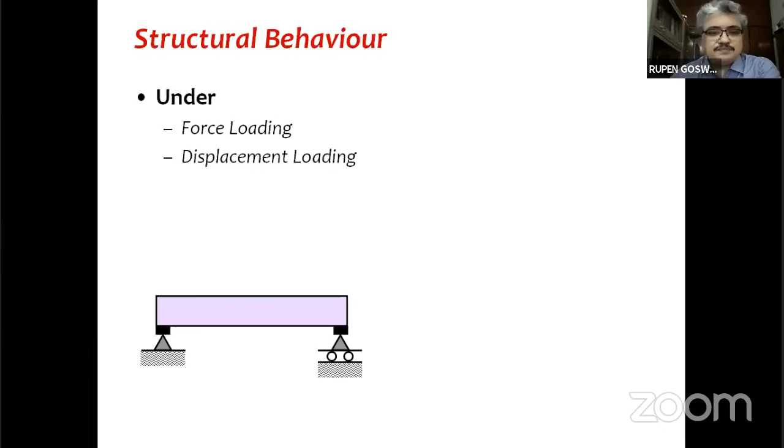To begin with, let us look at this: we have force loading and we have displacement loading. I will try to reinforce this thought through a simple example. Let us assume we have a simple, simply supported beam, and we apply a concentrated load at midspan - elastic material, prismatic section, everything. If we do this, we know there will be deflection and we should be able to calculate this deflection. If it is an elastic analysis, this is first or second year mechanics or analysis, so everybody should be able to calculate this deflection. The important point here is that when a load is applied on a structure, displacements or deformations are caused.

Now let us take the same beam example, and let's say we tie a belt at midspan and pull it down to produce a displacement delta. What will happen now? I'm sure everyone will realize that forces will get generated in the system. So when forces are applied on a structure, displacements are caused; similarly, when displacements are imposed, forces are induced. This is a very important concept that students have to get used to.

That's the first part. What is the second part? This is the tricky one. In the first case, if the load is applied at midspan, everybody will be able to tell what that deflection will be - if the length is L, if the flexural rigidity is EI, everybody will very quickly be able to tell what the deflection is.

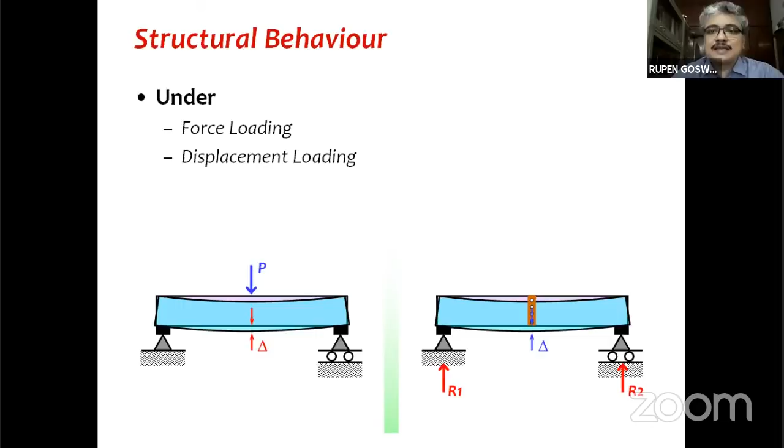The second level is to compute how much that force will be, which we have to get used to in order to truly understand earthquake resistant design. Now let me take this one step forward. Let's say we have two simple steel bars. In the first case, I apply a force, and as I apply an axial tensile force, there will be some axial displacement, which we can all calculate. As I increase the force, I will see more and more displacement.

In the second case, now I'm pulling it. Again, just like in the first case, there will be some reactive forces, because if this is the axial bar and this is the support, as I'm pulling it, I have to have a support reaction getting developed. So that is the force generated in the bar, and that is the support reaction. What is the big difference here?

The difference is in what happens post yield. In the force case, this is what is called a force control system, where the loading is force. A force is applied, and as it is gradually increased, deformation increases, but we cannot apply force beyond the capacity. The important thing is the margin between where the system yields, if it yields, and the maximum force that can be applied is limited.

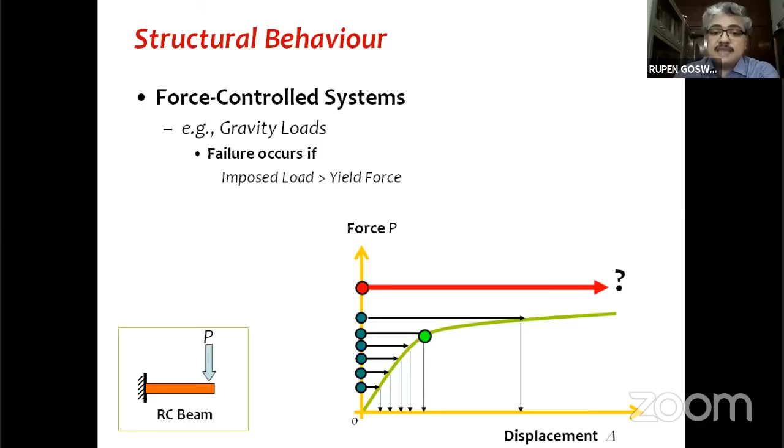But in the same situation, if a displacement is applied instead, it is possible to apply large displacements, much more than the yield displacement, provided we make the system ductile. That is the important thing: this margin can be increased to a large extent by making a system ductile. So what is this ductility?

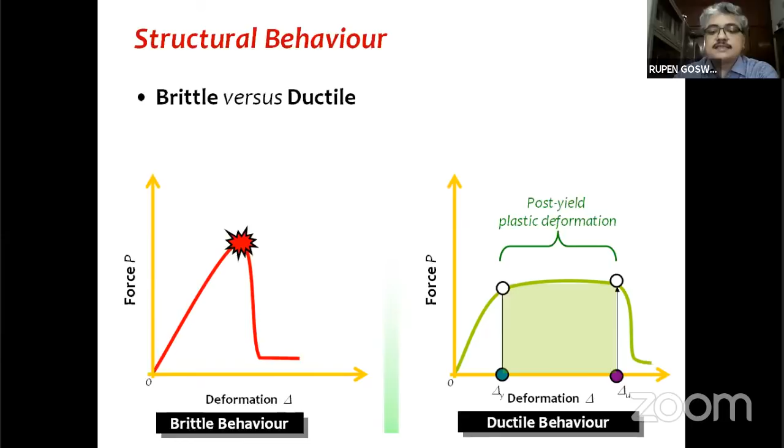In the first figure is the load deformation response of a so-called brittle system. As load or deformation is increased, it reaches a maximum and then suddenly fails, meaning the load capacity drops. In the second case, even after the system yields, it continues to sustain that load over a large displacement or deformation. It is this plastic, post-yield deformation that is important, and that is the measure of the ductile behavior of the structure.

So we define ductility capacity as the ratio of the ultimate deformation to the yield deformation. Note that the point where it effectively yields signifies damage beyond that. So ductility comes only after damage has occurred in the structure. An elastic structure exhibits no ductility. So when we talk about ductility, damage is inherently part of that behavior.

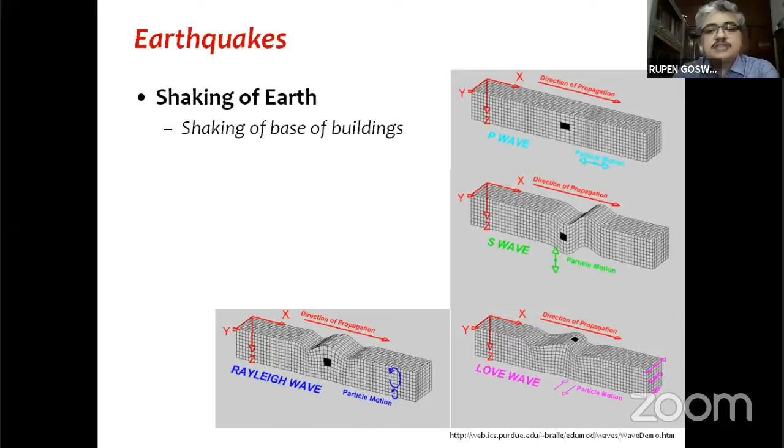Why are we talking about all this? Because earthquakes essentially cause shaking of the earth, which is nothing but shaking at the base of the structure. The bigger the earthquake, the larger this shaking. This shaking is nothing but movement at the base of the structure, so essentially it is a displacement loading acting on the structure.

How much will that displacement or shaking be? That depends on how big the earthquake is. There can be a small level of shaking, a medium level, or a large displacement imposed at the base of our structure. How do we measure that? One way is, of course, magnitude as a measure of the size of earthquakes, and there are different magnitude scales, which I will not go into in detail.

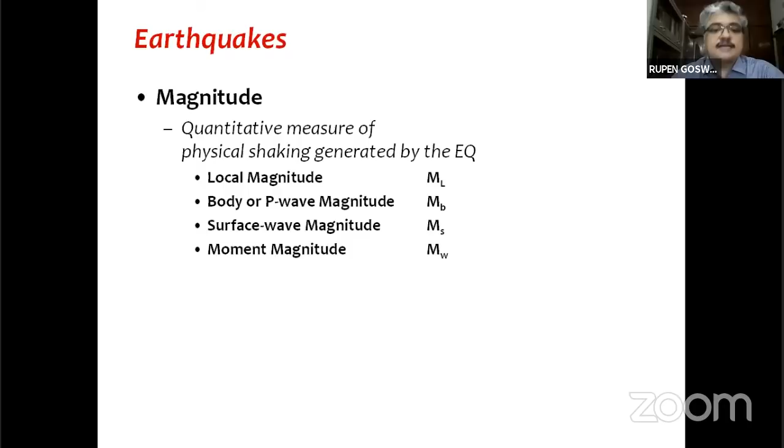One of the most common ones we use is the Richter magnitude, which is measured based on how big the peak is in an accelerogram. Based on that, the size of an earthquake is usually denoted. Of course, every earthquake is unique, having different amplitudes, different durations of shaking, and different frequency content, which was also mentioned yesterday by Professor Murthy. So they are all unique.

But the question is, how does it matter if there is a very big earthquake, for instance a Chile earthquake, which has very large amplitude and duration?

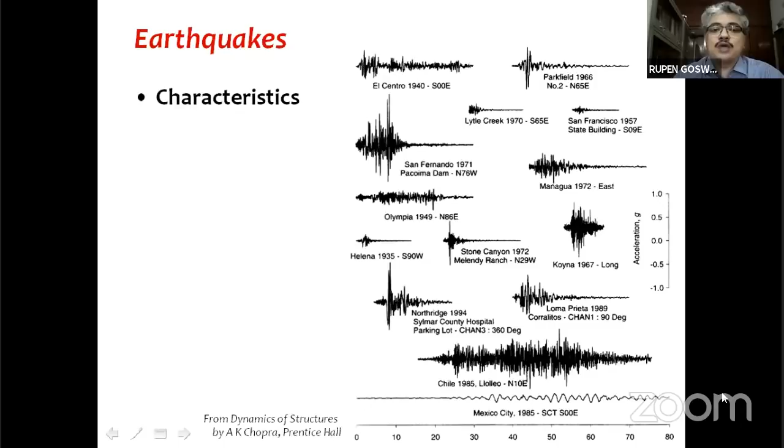Did we in India feel anything when the big earthquake happened in Chile? Of course not. So is magnitude really what we should be thinking about as structural designers, as engineers? The answer is no. That is why we talk about something else: the intensity of shaking.

Essentially, we try to look at what is the zone of influence of an earthquake and how big the shaking has been in that particular zone of influence. So therefore, we use another measure, another scale for measurement of earthquake size, and that is intensity.

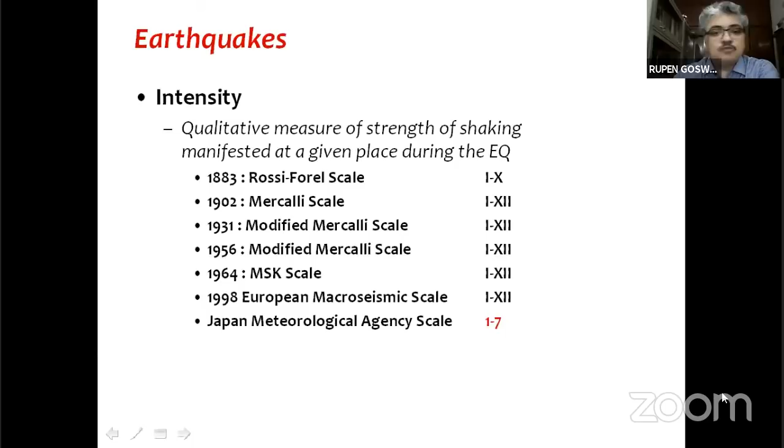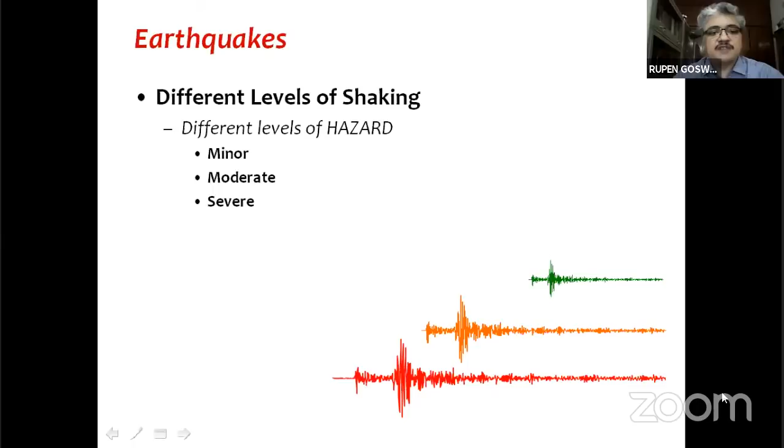So coming back to the point that there can be different levels of shaking, we loosely call them minor, moderate, and severe level of shaking. The other aspect is that if we look at the size of earthquakes using magnitude as a measure, we see that many earthquakes occur which are small in magnitude, and very few occur, on average, which are very large. So there is a certain distribution of these earthquakes.

This is where the concept of return period of earthquakes comes in, whereby these small size or minor events occur very frequently. Over a certain period of time, there will be many such small earthquakes, some moderate number of medium size or moderate events, and very few very large, severe events.

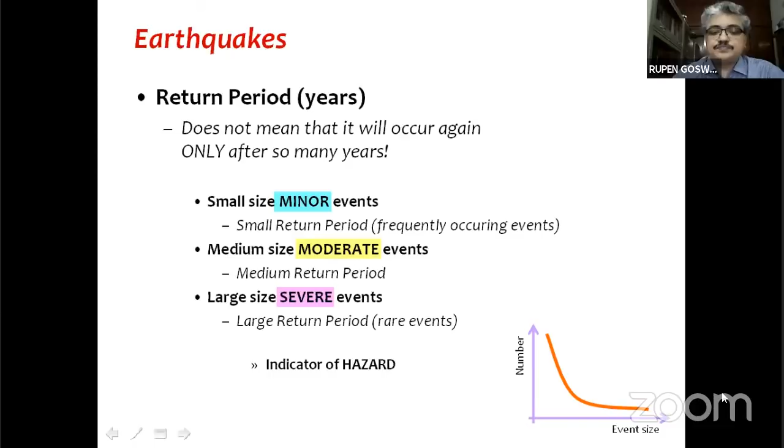So these minor, moderate, and severe levels of earthquakes, depending on their size, will cause a small amount of displacement loading on the structure, a medium level of displacement loading, or a high level of displacement loading on the structure.

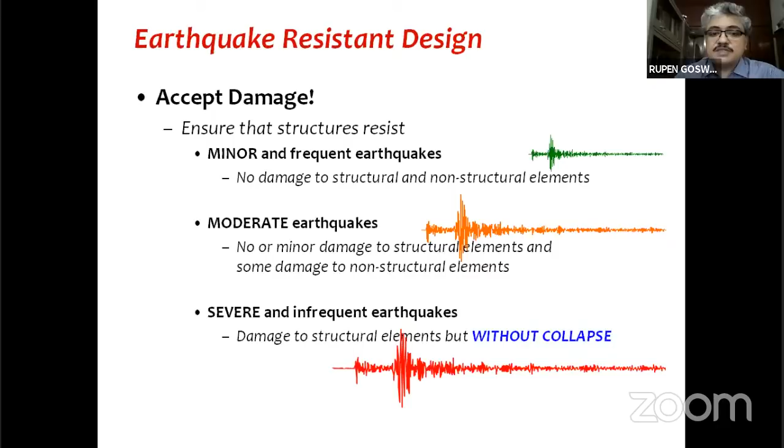But when that very large earthquake comes, once in a lifetime kind of situation with very large return period, then the only criterion I'm putting is that my structure should not collapse. It can get damaged. It is supposed to get damaged because as a designer, I have designed it to get damaged. But the only condition is it must not collapse. So this is where earthquake resistant design becomes so very different, so very special.

If it was reinforced concrete, here is a steel building. If that building did not collapse, here you have a 21-story steel building, which you are seeing, which collapsed during the 1985 Mexico City earthquake.

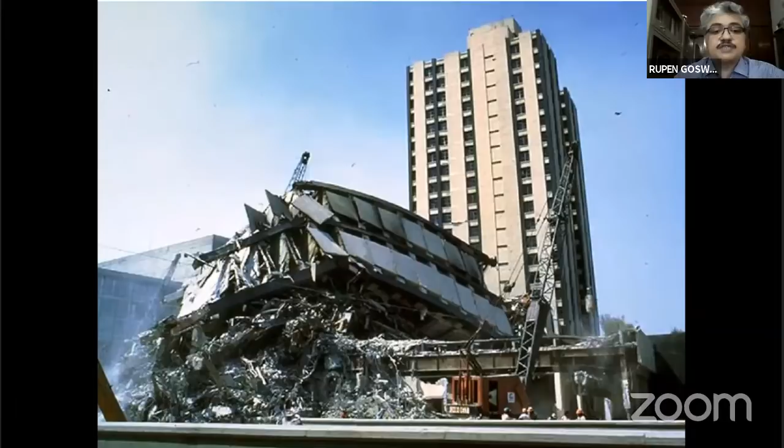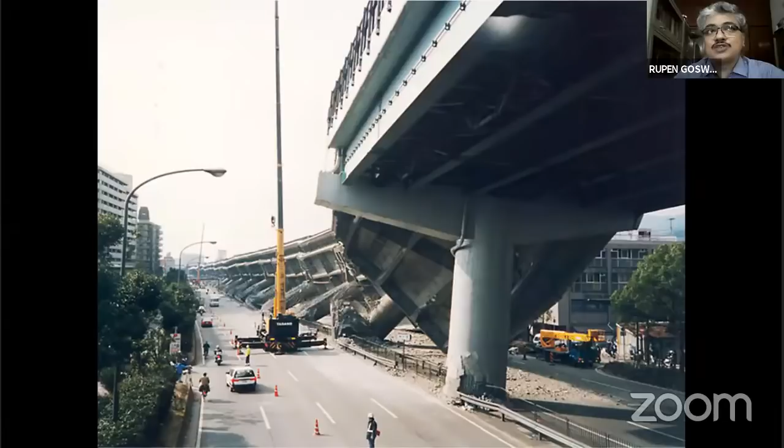So what went wrong? The only thing that went wrong is that we designed the structures, but we did not ensure, we did not guarantee that displacement capacity that is required to resist the big events. Strength is not the issue. We were supposed to provide the displacement capacity and the ductility capacity. That was where we missed the bus.

So quickly to summarize, we deliberately design structures for a much lower level of force so that we don't have to design for such a high force. So anybody who says seismic design is going to make my structure costly, actually it's wrong. The seismic design is built in a way to bring in economy in design. Otherwise, if we want a structure which should not get damaged, that structure would have cost much more.

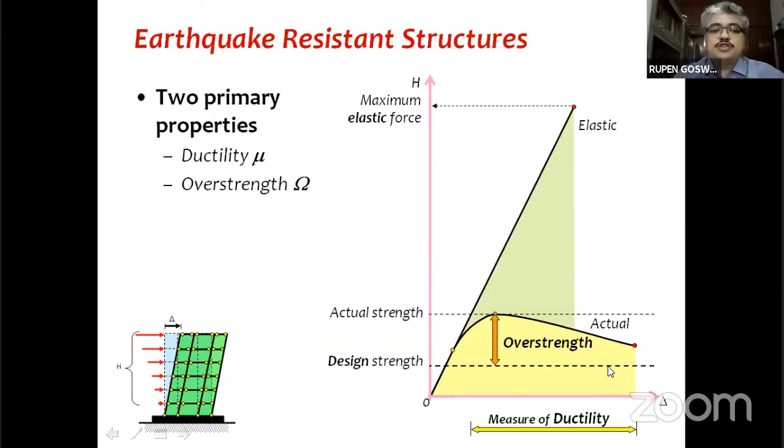But then we also realize that there is another issue of overstrength, because the way we design our structures, our design methods, we use partial safety factors and so on, all that gives some overstrength. So there are two issues: one is ductility and the second is the overstrength. And that is where we combine these two along with redundancy, we'll see, to reduce the force for which we actually have to design our structures, and that we do by use of response reduction factor.

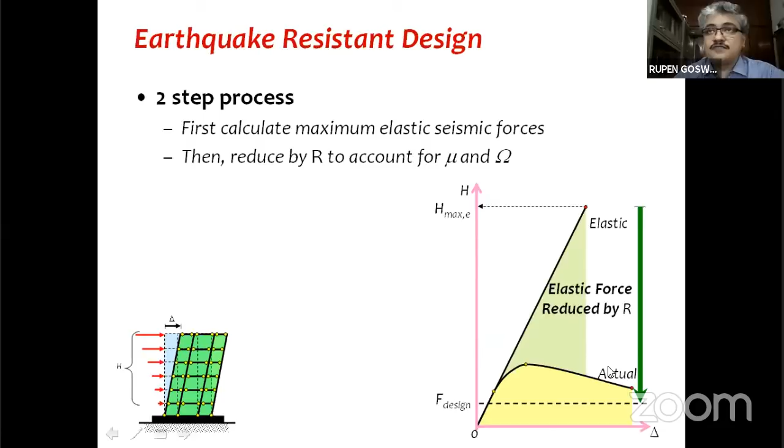Very popular item for earthquake designers. We want to use as high a response reduction factor as possible. So we first calculate the elastic force that would have been induced in the structure if it were to remain elastic, but then we don't design for that high force. We reduce it by use of response reduction. And this is where the key is.

How much should the response reduction factor be? Can I reduce the force capacity to this level, this level, this level? How much? So let us understand that. If the structure were to remain elastic, that would have been the amount of force which would be induced in the structure. But we don't want that. We say, oh, that will be too costly. Design it for little lesser, give me little more economy.

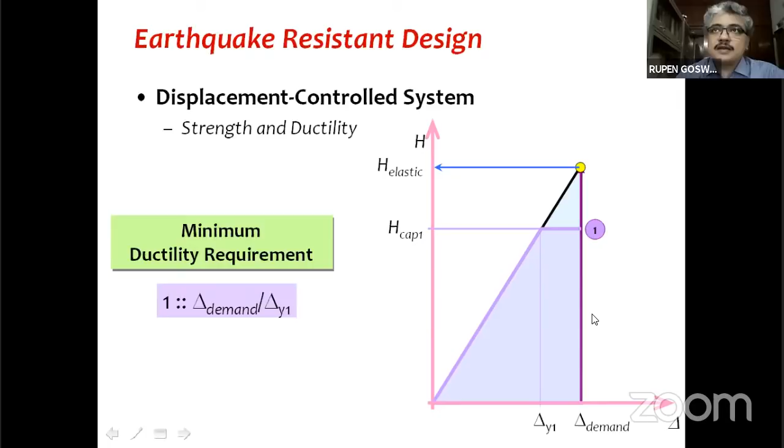Fine. As a designer, you can give this as an option. You said, okay, you don't have to design for that. Your structure doesn't have to have that high capacity. It is okay to have this much strength capacity. But then that structure will now be getting damaged at that level of displacement. And therefore, there is a certain ductility requirement that comes along with the reduction in the capacity.

You can say, oh, this is also too costly, give me little less. Well, now that little less comes with a little more requirement of ductility, and so on. The question is, can we go on reducing the strength requirement by promising more and more ductility? Answer is no, because there is a practical limit of how much ductility that can be put in structures. And that is where design codes come in and say, look, you have to design your structure for at least a minimum lateral force, because we cannot go on reducing the design force indefinitely.

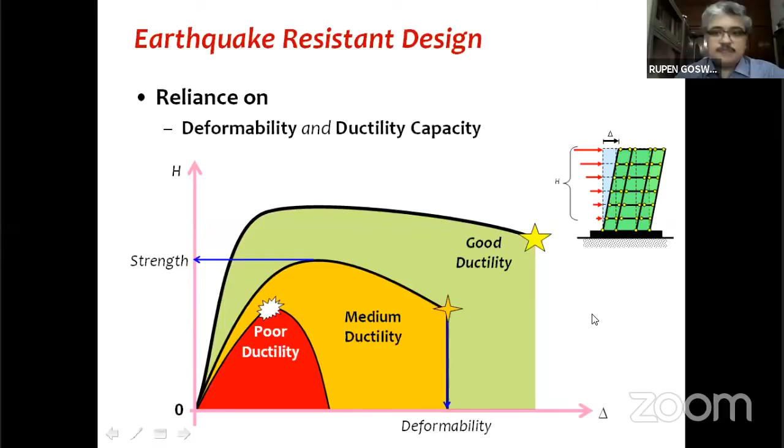Although in earthquake resistant design, reliance is placed on deformability, which is displacement capacity and ductility capacity, design codes also talk about this basic minimum design force, at least currently.

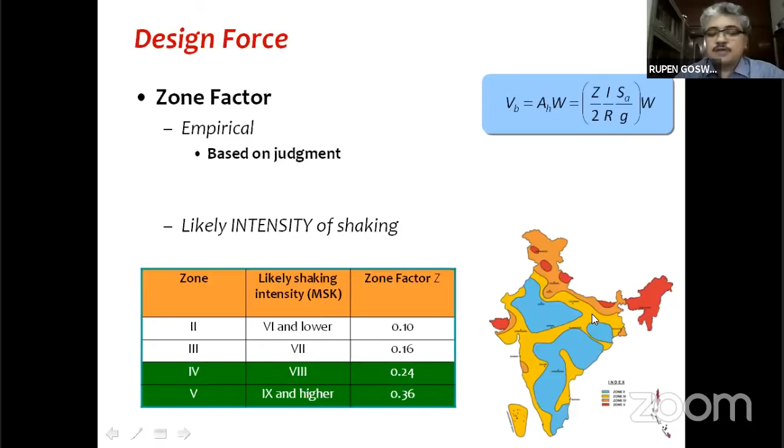We all know our country is divided into 4 zones, and we have these zone factors. Essentially the zones represent the likely intensity of shaking. Zone 2 is expected to see intensity of shaking of 6 and lower, whereas zone 5 sees intensity of 9 and higher. Professor Raghukanth will talk more about this aspect of hazard, so I won't touch upon that.

This factor 2, Professor Murthy mentioned yesterday. I will not talk much about it, except that we are just using it. Hopefully in the near future, we'll sort this out and come out of that.

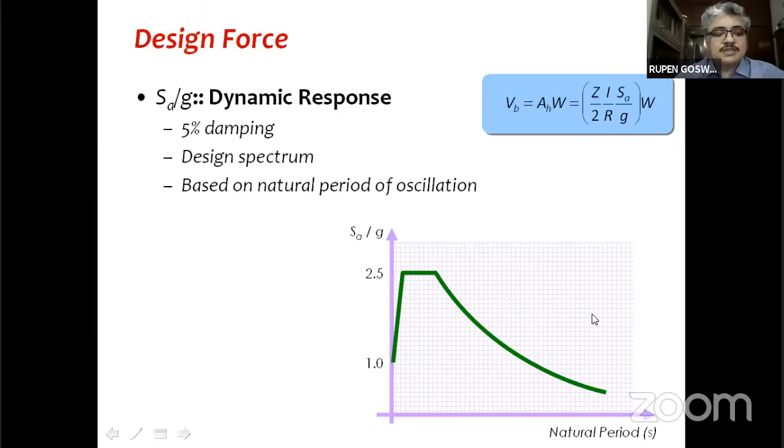Then, of course, we have this design spectrum, which essentially captures the possible dynamic behavior of the structures, and then the importance factor. Now, what is this importance factor?

We can't treat people who are injured during earthquakes. So if you want less damage to happen, then you have to necessarily enhance or increase the strength capacity of the structure. And that we do by use of importance factor.

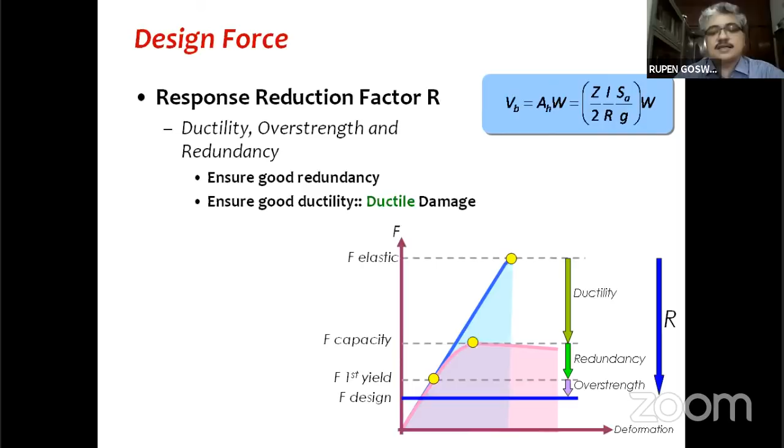And then finally, the response reduction factor that we use in the denominator to come to the design force from the elastic force that would have been induced in the structure if it were to remain elastic. Here our design codes, for instance, if you go to table 9 of IS1893 part 1, 2016, it will give response reduction factors for different types of structural systems.

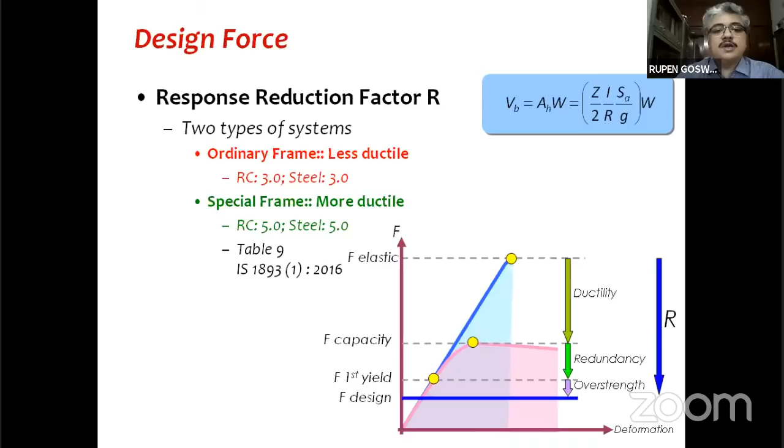Essentially, we classify our structures into two groups: one we call ordinary, which are not so ductile, and one we call special, which are supposed to be ductile. And therefore, we use a higher response reduction factor for that. So that is the whole issue.

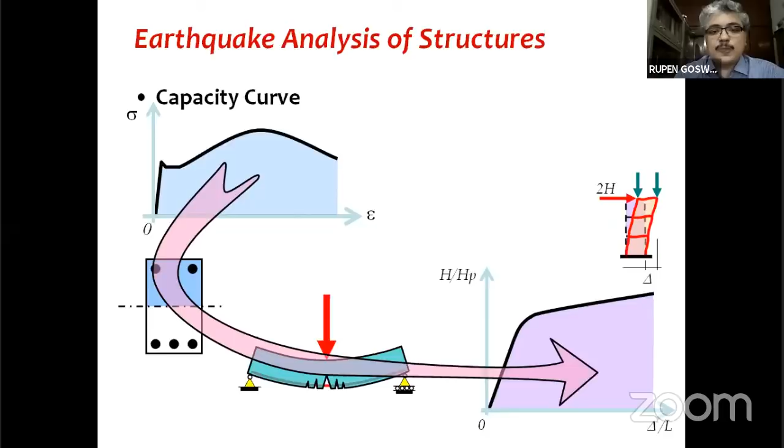If we start applying lateral load, we know this will be the bending moment diagram. So if damage has to happen, it will happen where bending moment is maximum, which is at the ends of the members, at the end of the beam and at the end of the columns. Now, since the beam has lesser capacity than the column, as this lateral load goes on increasing, if damage has to happen, obviously it will happen in the beam.

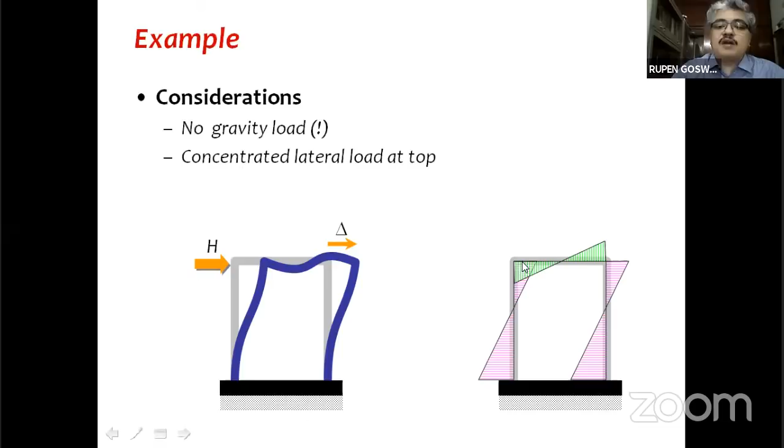So this is what we'll get: as it is being pushed, we will see two plastic hinges form in the beams for this particular case. And we can compute at what level of load and what level of deformation this will happen. So that is the load deformation graph up to that point.

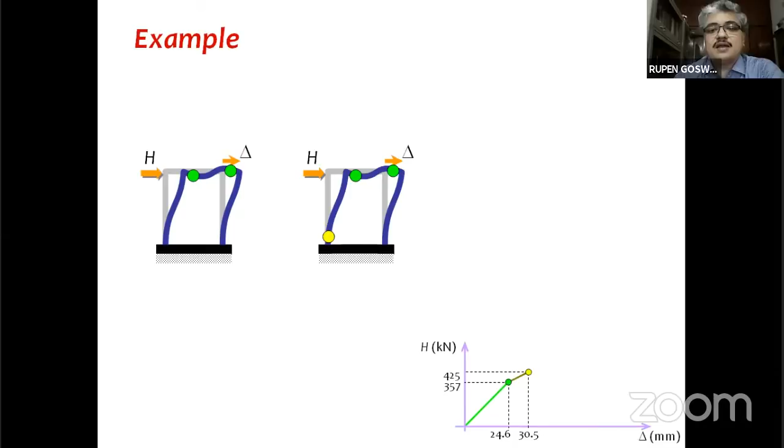If we continue to push further, we will see this left end, let's say for this particular example of the column, will form a plastic hinge, and it is possible to calculate that load and deformation. If we continue further, eventually a plastic hinge will form at the bottom of the right column also, and that will be the load deformation.

Now, if you see the last one, you see that there are 4 plastic hinges, and that means it has formed a mechanism. What will happen after this? Well, if each of these 4 plastic hinges can continue without losing strength, the structure will go on like that.

But that seldom happens because real structural elements made of real materials have limited deformation capacity. So at a certain point of deformation, the whole structure will start losing its lateral load capacity, strength capacity, and it will come down. The lateral load will come down like that.

So this is how typically structural nonlinear analysis is done. For simple structures, it is also possible to do such analysis by doing piecewise linear analysis. For the first part, this green part, this is the structure we can analyze. For the second part, when the plastic hinges are formed, we can still do linear elastic analysis for a structure modified like this, and we will get only this increment of the load and deformation, and then subsequently we can analyze to get this little increment.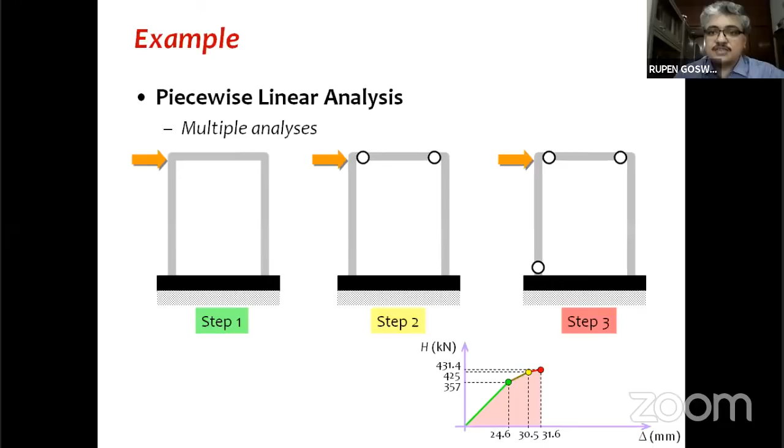So this is how typically pushover analysis is done, to ascertain whether the required deformability and ductility is provided in the structure or not. But the basic question still remains: how do we actually provide ductility?

The simplest way is to prevent all brittle modes of failure. If we can prevent in a structure all possible brittle modes of failure, the structure will not have any choice but to respond in a ductile manner.

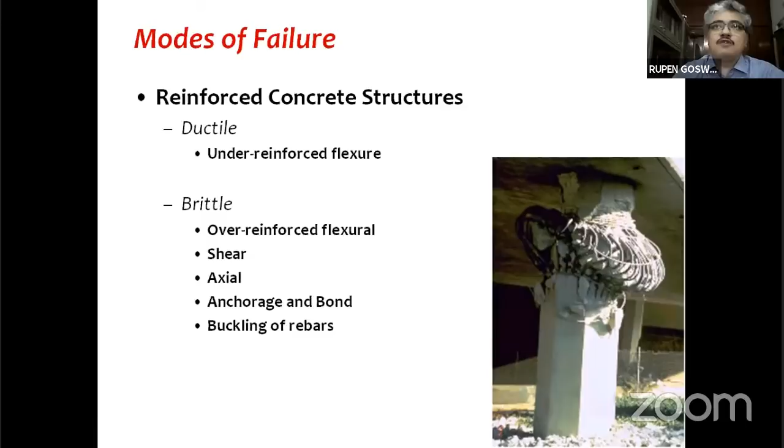So very quickly, in reinforced concrete structures, the only mode which is ductile is under-reinforced flexural action. That is why IS456 says over-reinforced sections are prohibited; you have to design necessarily under-reinforced sections. Similarly, in steel, flexural response only in compact sections, plastic sections is allowed—slender sections, semi-compact sections are not allowed. All other modes are generally brittle in nature.

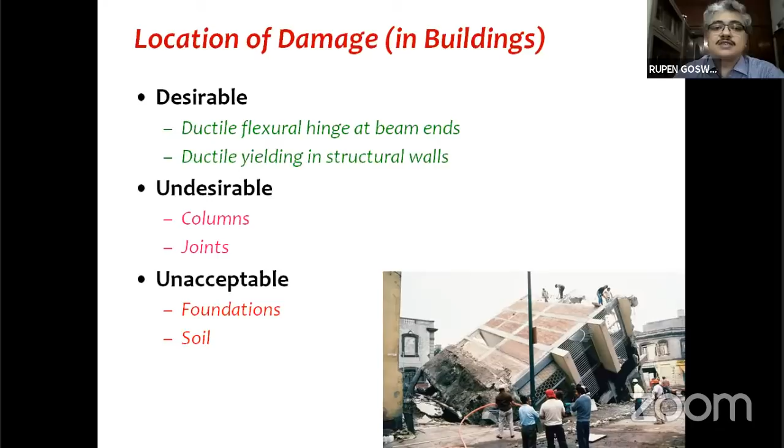So that is about what mode of damage is desirable. Typically in frame buildings, frame structures, the ideal location is the beam ends, as we saw in the previous example.

So the strategy is that we want to design our structures for a lesser force. Therefore, we have to allow damage. The question now is of what type. We have understood that we have to allow only ductile modes of damage, and only in favorable locations. For instance, in a moment frame, only the beam ends are the favorable locations, not the columns.

Why? Because if you see the PM interaction, and if you remember the charts in SP16, they have these radial lines, and there is a point called the balance point. If the axial load level, the compressive load, is higher than that balance point, failure is going to be by crushing of concrete. Whereas if it is below that point, then it will be by yielding of tensile steel, which essentially is an under-reinforced action that gives you ductility.

Particularly if we have small size columns, the axial load ratio will be very high, and that will give a brittle mode of failure. So we do not want damage to happen in columns, because often that damage will be brittle in nature. It is only at beam ends that we allow damage which can be made ductile.

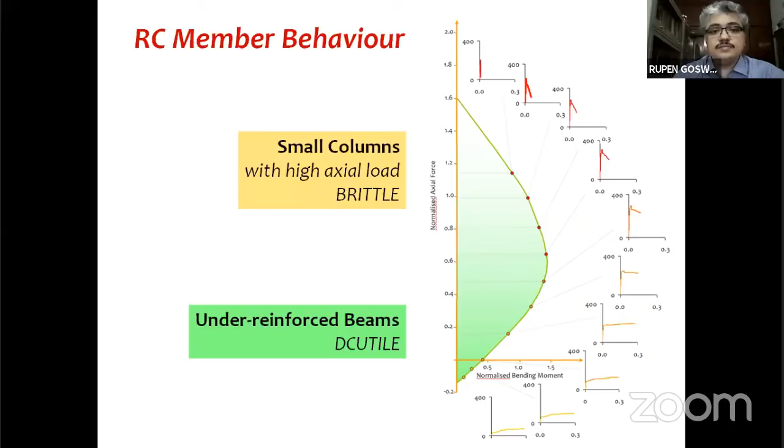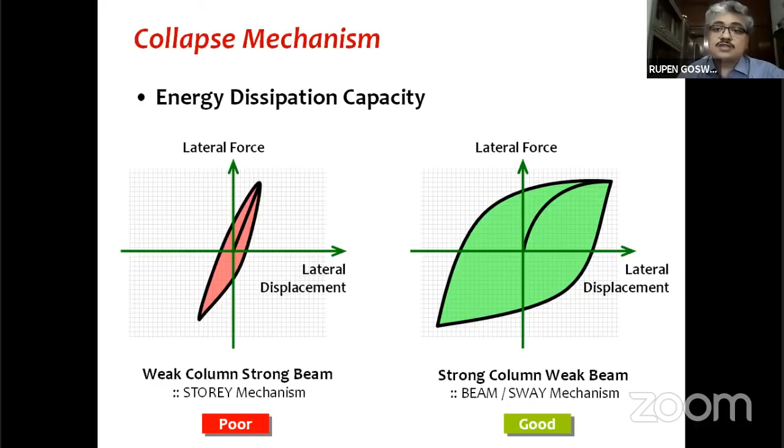This was the seventh tenet shown by Professor Murthy yesterday. We essentially want structures to have large energy dissipation capacity, so that a big earthquake, which feeds a lot of energy into the structure, is able to dissipate that faster. So we need that. How do we actually ensure this happens? We ensure this through the concept of what is called capacity design.

There are two aspects to it. One is setting a hierarchy of strength, which in turn dictates the sequence in which damage happens. In that example we saw, beams had lesser strength capacity, moment capacity, so damage first happened in the beams. The plastic hinges were formed in the beams first, and that is how the hierarchy of strength helps in sequencing the damage.

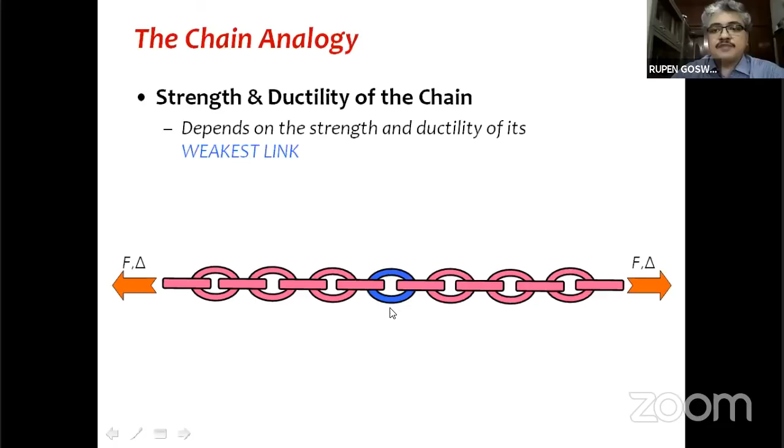Most of you would have come across this chain analogy. What is said is that the strength and ductility of a chain depends on the strength and ductility of its weakest link. Let's say we have a chain and a force or displacement is imposed at the ends, and we have many of one type and one of a second type of link. One is a brittle link, one is a ductile link, and we have two options here.

The first option is that we have many strong brittle links plus one weak ductile link. So you can see that there is a hierarchy of strength. The brittle links are stronger here than the ductile link. Or we have another option where the brittle links are weaker, having lesser strength than the ductile link.

Which option is desirable? Which option will give us an overall ductile chain? Obviously the first one. So what we learn from here is that the brittle actions must have strength larger than the ductile action. Then only damage will happen to the ductile one, and thereby we will get a ductile response. This is the most important concept that we have to understand.

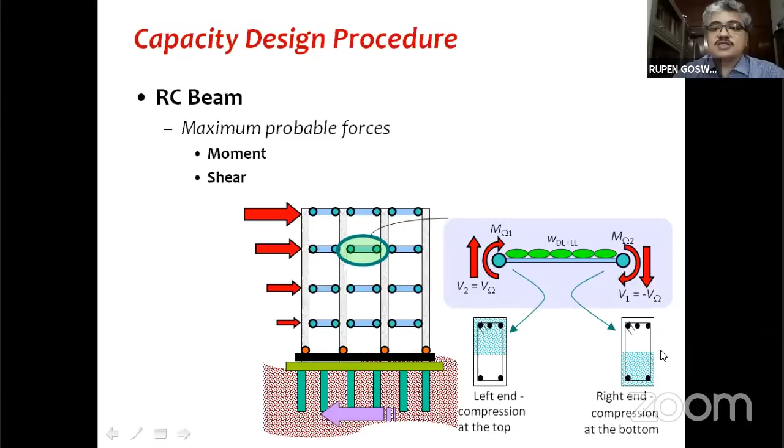How is it applied to actual structures? Let us look at a frame structure. We have beams and columns. Now let's say we are designing a reinforced concrete frame. We design the beam, we design under-reinforced beams, and this is how we get the cross section. We design the size and we design the longitudinal reinforcement.

But then we should realize that the actual moment capacity of the beam is going to be more than what we calculate it to be. So if mu is the design moment capacity, the actual, most probable moment capacity is more than that. How much more? There is going to be, when the plastic hinge forms and curvature is increased, the steel going into strain hardening. There is always a strain hardening region in steel, and that is typically considered to be about 20% of the yield strength. That much extra stress can be generated.

And remember, in calculating mu, we use a partial safety factor of 1.5 for concrete and 1.15 for steel. If we remove that, we see that the maximum moment capacity will be about 40% more than the design moment capacity. And this is the overstrength.

Is overstrength always good? Having more strength is good? No, not always. This is important because now when those plastic hinges are formed, for equilibrium, the corresponding flexural overstrength based shear, equilibrating shear, will be generated as calculated. In all cases, this shear will be much more than the shear force you would have got from your basic structural analysis. So while the flexural design is done based on the structural analysis using the design force, the shear design now has to be done for this shear, and not the linear elastic shear force from your analysis.

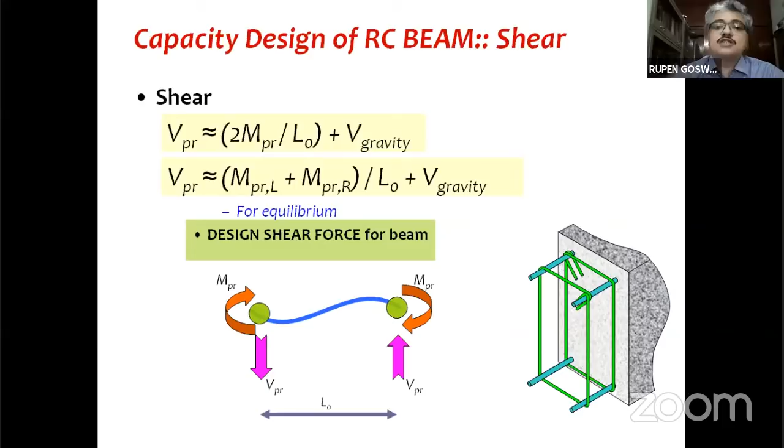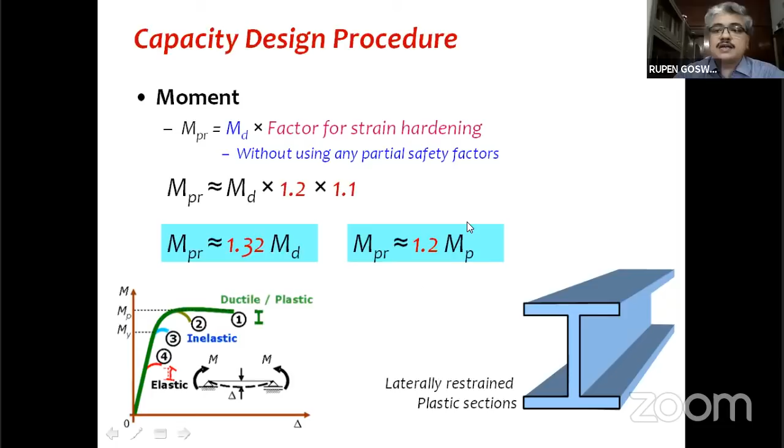Same is the case with steel. We can have a steel frame and we design the cross section. In this case, we will design nice plastic cross sections as beams. But again, the actual moment capacity can be higher, considering 20% strain hardening, and if we remove the partial safety factor gamma m naught from IS800, then we are talking about something like 30% more. But if we denote it in terms of the plastic moment capacity, not the design moment capacity, then it is about 20% more.

Again, for equilibrium, this will be the associated shear force. But typically hot rolled sections are proportioned so that they are able to resist that shear. The point in steel though is that you also have the connection to design, and thus the connection design force now comes through the actual capacity of the ductile element, which is the beam. Now the connections have to be designed.

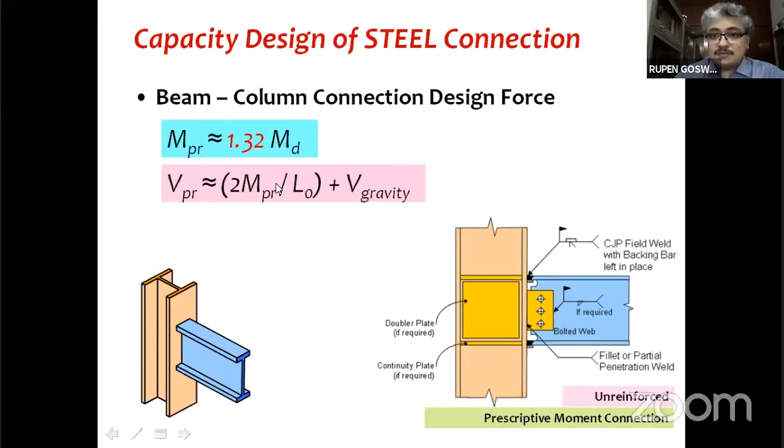Let us continue to focus on this beam. So now we have these plastic hinges formed, the maximum probable moment that is generated, and the equilibrating shear. But that also means that now the columns are also subjected to these forces, assuming that the points of counterflexure are at mid height.

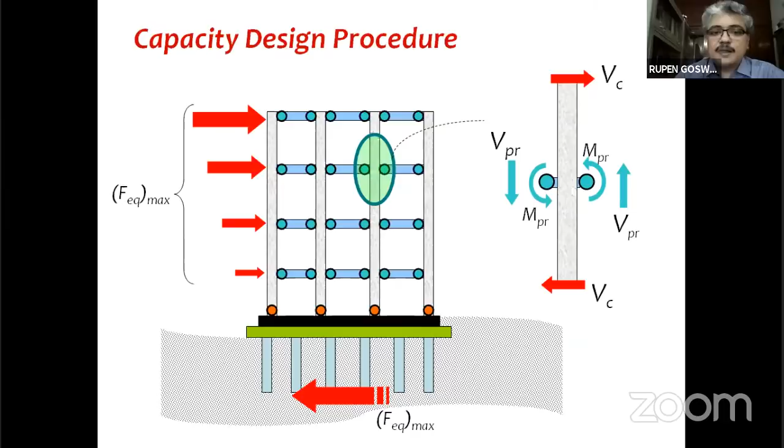So this is the shear force acting on the columns. If we do not want our columns to fail in shear, we have to design our columns for shear. Is this supposed to be done for reinforced concrete buildings or steel buildings? Both. It doesn't matter whether it's concrete or steel.

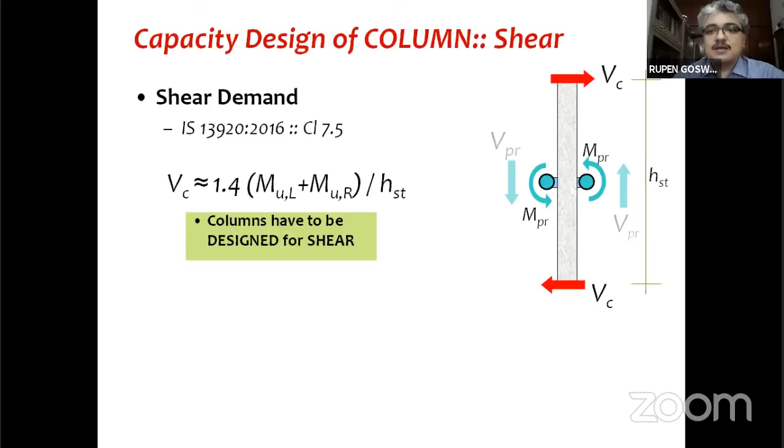Force action is force action. So columns have to be designed for shear, and this is important because when we design columns, unfortunately, if you ask what is a column, most people will answer it is a compression member. But no, it is not only a compression member. Columns are also subjected to bending moment and shear force, and shear is a brittle action. If we don't design our columns for shear, they are going to fail in a very brittle manner, and that is where our structures are going to be brittle. Not good.

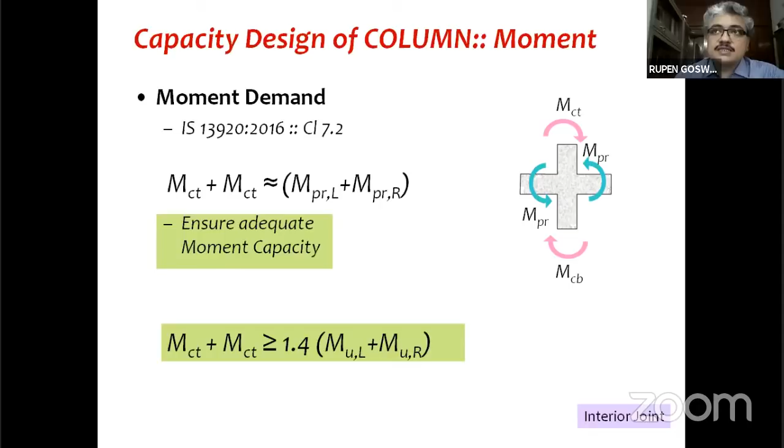Taking it further, if we zoom in and look at the beam column joint, we see that for these moments generated in the beam, for the joint to be in equilibrium, the columns will also have these end moments. That is how we say the columns have to have capacity to resist the maximum probable moment, not the moment we got from linear elastic analysis for the design force, but the actual force which can be generated.

So you can see both IS13920 and IS800 give a requirement for how much stronger the column should be than the beams, because this is the only way we can ensure that those nice ductile plastic hinges form only in the beams, columns are not damaged, and therefore the structure as a whole has higher ductility capacity and deformability.

I'm sure Professor Jaya and Professor Satish Kumar will offer much more on each of these items when they speak. But I want you to focus on these two numbers and think about why they are slightly different, they're looking different. And the second question, of course, is, are they enough?

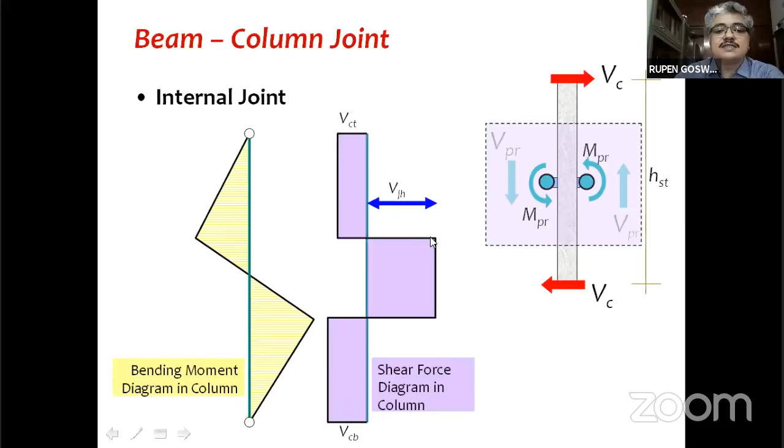Also, when we draw the bending moment diagram, we forget the size of the joint. But essentially, the bending moment diagram in the column goes through a high gradient here, and the gradient of bending moment is nothing but shear force. This is the shear that the joints are subjected to.

So in reinforced concrete, we have this beam column joint, and in steel moment frames, we have this joint panel zone, which is subjected to this very high level of shear force. They have to be designed appropriately. If we don't design the joint panel zone and the beam column joint for this shear, we will see that these joints can fail, and those are brittle modes of failure again, which we do not want. So design of beam column joint and panel zone are important design issues that a designer must take care of.

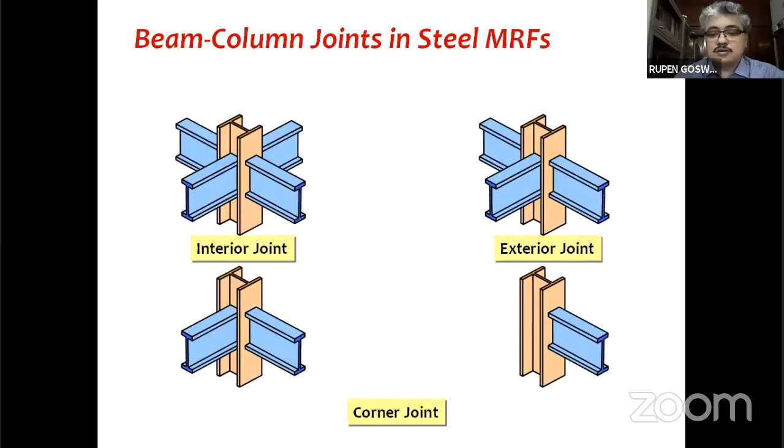So essentially, this concept of capacity design is the rationale behind most design provisions in seismic design codes, not just in India, but across the world. For us, we have IS13920 for reinforced concrete structures and IS800 section 12, particularly for steel structures. But essentially, these extra provisions are required for what is called lateral load resisting systems.

And there was, I believe, a question about that. What is this lateral load resisting system all about? So if I show a plan, let us say what we are seeing right now on the screen is the typical plan of a nice rectangular building. Those are the grid marks, the beam center lines, and those are the locations of columns.

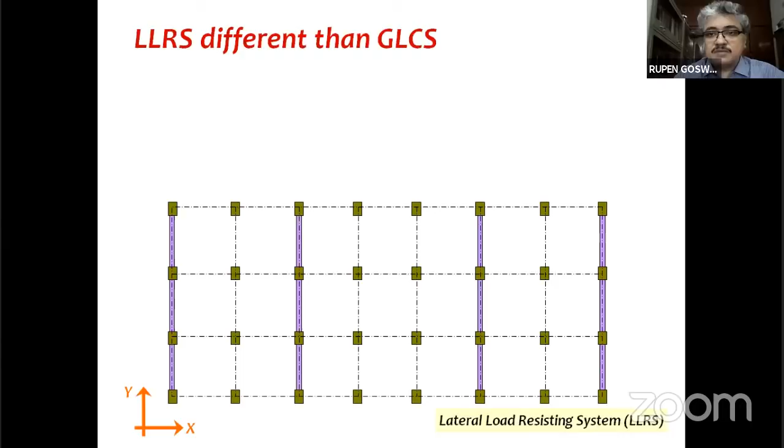Which are these beams and columns that we need to design to resist earthquake? We need not design everything to resist earthquake. For instance, I can choose only these 4 frames to resist earthquake in the Y direction, and only these 2 frames in the X direction to resist seismic force in the X direction. This is what even IS13920, for instance, says.

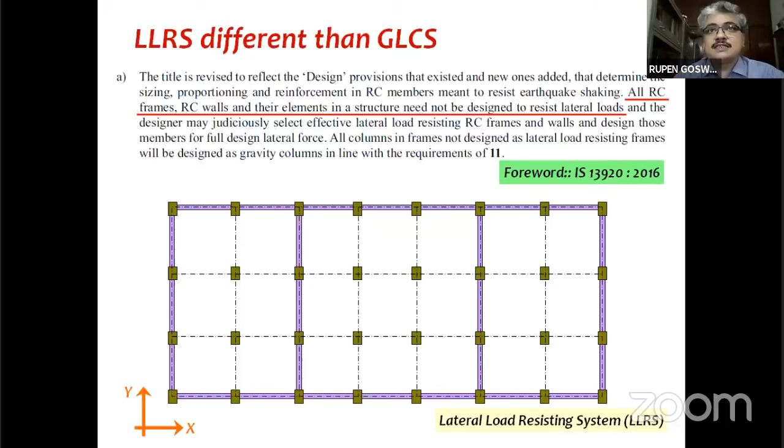Now, the question is, how do we decide on this? Typically, design engineers say that in some commercial softwares, we will release the end moments of the members, particularly beams. That is not the way to do it. The idea is that the identified lateral frames must draw the force onto themselves. So for instance, if we provide the same size of beams and columns in all these 5 frames, each one of them will take 20% of the total lateral load acting in this direction, the Y direction.

With a rigid diaphragm, the distribution of load will be proportional to the stiffness. We'll see that these 2 lateral frames will take only 40%, 20 plus 20, and the remaining 60% will go into this. This is not where we want, since these 2 are supposed to be the lateral load resisting system.

So what do we have to do? We have to make them stiffer. How? By increasing member sizes. Of which members? Beams and columns. But increasing the size of beams is not very practical, so increasing size of columns is the way. As the columns are made stiffer, these 2 frames start drawing more and more percentage of force. Of course, we'll never reach 100%, we'll stop at some value, maybe 90%, 95%.

That is how we make a chosen frame the lateral load resisting system, not by releasing end moments in commercial softwares. In steel, we have to do a similar thing, but we also have a simpler choice: designing pin connections between beams and columns instead of moment connections. That helps a little bit more.

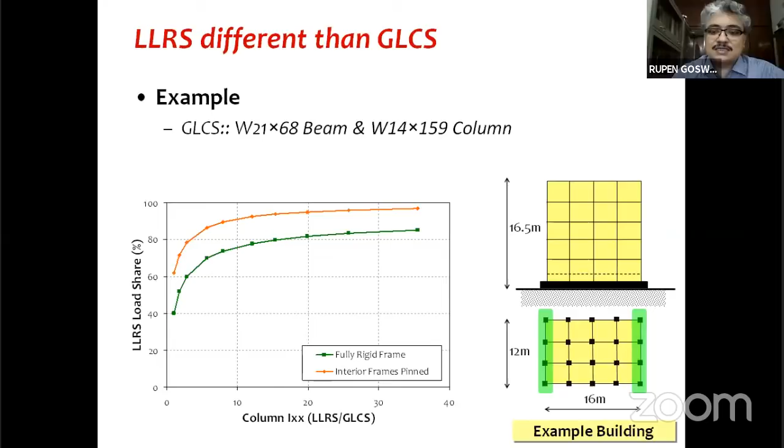So there is an importance to distinguish the lateral load resisting system from the gravity load resisting system, which is essentially all the other beams and columns. They need not follow all the seismic design provisions, except that they have to be designed for compatibility. When the entire lateral load resisting system deforms, these members will also deform and induce additional moments, so they have to be designed for that.

But one very key aspect in all these buildings is what you see at the bottom. What do we find there? We all know the story of Kalidasa, who sat on a branch and chopped off the support. The lesson is that you are not supposed to weaken the support. If you do, you are going to fall down, and the system is going to break.

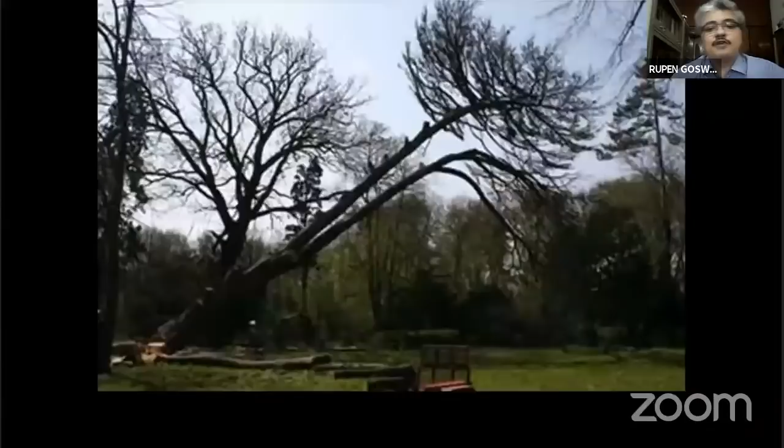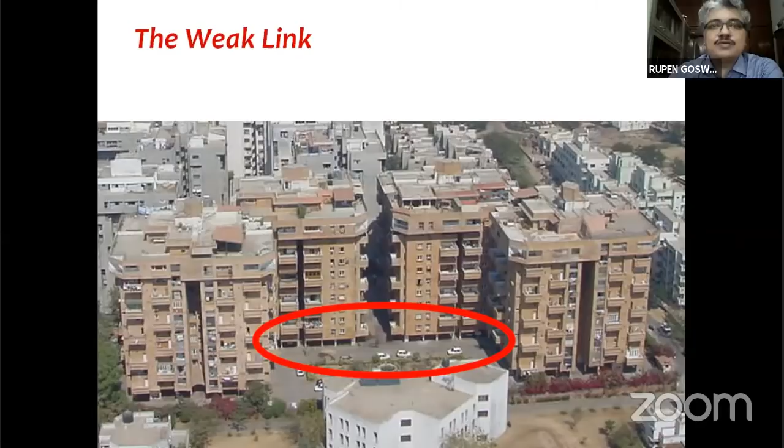That is exactly what we are doing to our structures. It all looks nice until you focus and suddenly see that the support has been chopped off. The whole entire sturdy building is as if being supported on these nice, flimsy, toothpick-like columns. That's the weak link. The base of the building is the support, and it looks bad, as if it has been cut off.

Why do we do this? Because we want parking space. Very good, we want our cars to be parked, they are a very valuable possession. So we have to have the ground story completely open.

If buildings don't collapse all the way for some reason, we will definitely have damages which are non-repairable. You can see the damage at the base of the columns, not repairable by any stretch of imagination. So although the building has not collapsed, this building is now useless, it has to be brought down.

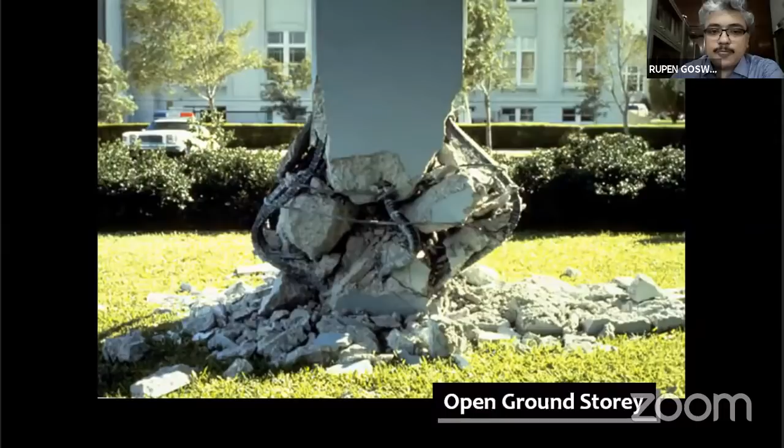Why did we see such things? We all know as lateral loads get accumulated, the demand increases as we come down, and that is why the desired capacity should be like this: as we come down towards the base, which has higher demand, logically the base should have higher capacity. But no, we don't provide that. In terms of stiffness, we provide 1/10, possibly even worse than that. In terms of strength, we provide half, 1/3 the strength at the lower story.

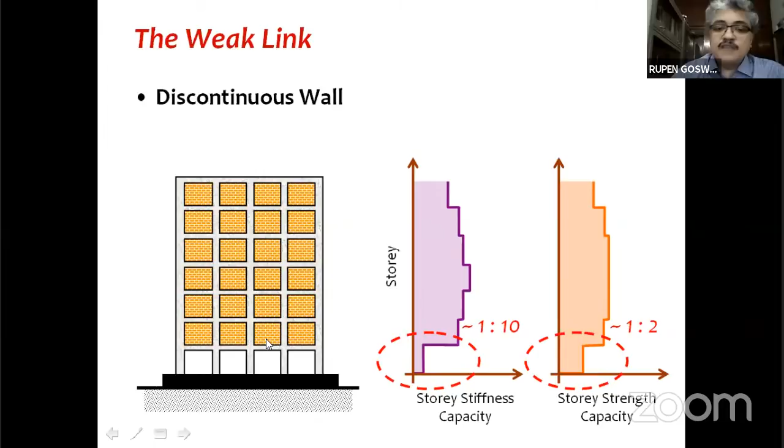Why is that? Because in the upper stories, we have these so-called infill walls filled in the moment frame, but in the ground story, because we want parking, we have removed the infill frames. Now, infill frames we kind of treat as so-called non-structural elements. They are not.

For earthquake resistance, infill frames are structural elements. They are not non-structural elements. Why? Because when the moment frame tries to swing back and forth during earthquakes, these infill frames come in their way and say, no, you can't move, I'm here. And that is where they resist that movement. They offer stiffness, they offer strength.

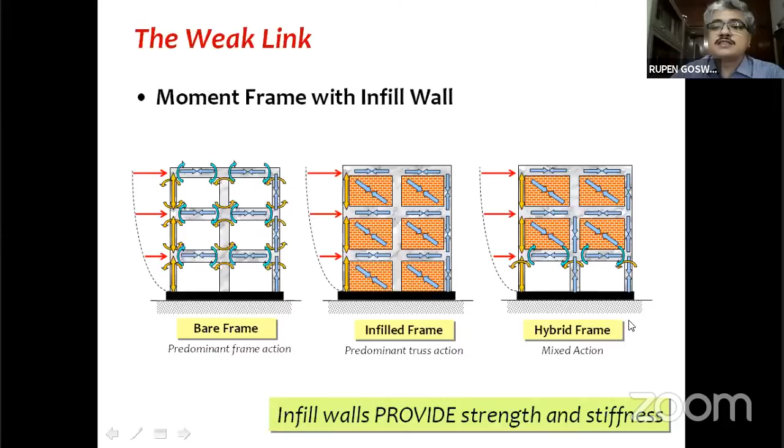And that is why these infill frames are not non-structural elements. So what it does is essentially change the entire load transfer mechanism. And suddenly this open story sees a tremendous amount of moment and axial action in the columns. And that is where the columns get damaged, they fail, and the entire building comes down.

IS 1893 part 1, for instance, has a separate section on buildings, and in that they talk about irregularities. It says all efforts shall be made to eliminate irregularities by modifying architectural, planning, and structural configurations. So both architects and engineers have a responsibility to ensure that we do not construct buildings which have these irregularities, or in other words, deficiencies, which can affect their seismic performance. I will not go into the details since we don't have much time.

But essentially, to summarize, there are two basic types of irregularities talked about in IS 1893 part 1. They are plan irregularities and vertical irregularities. There are 5 plan irregularities and 7 vertical irregularities as given in tables 5 and 6.

Some of these irregularities are bad, but not so bad. You can negotiate, you can live with them, you can say okay, fine, we will do something. But there are some which are absolutely non-negotiable. It's like good habits versus bad habits. Everybody has some bad habit, but you don't go and kill people. That's not a bad habit, that's unpardonable.

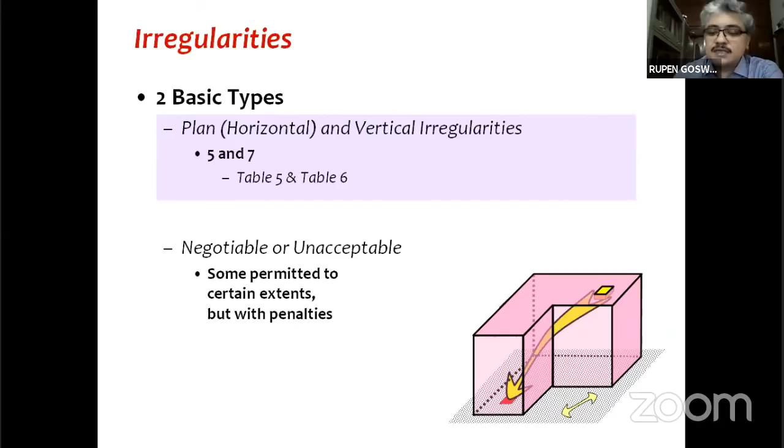So the code also tries to classify them and gives clear instructions as to what is to be done when you have these 12 irregularities. It gives a clear strategy of how to handle them. Here I will focus only on three of them. Not that these are the most important and others are not, but for want of time, I'll just focus on three.

So here is the situation: there was a shear wall, an RC wall, and then suddenly in the ground story, because we wanted this opening, we shifted it out of plane and moved it one way back. The wall was coming nicely, but suddenly we want an opening here, so we moved this wall. What it does is create a discontinuity in the load path. All the load which was coming here suddenly doesn't find continuity of load path. The load has to turn here, go back, and come down.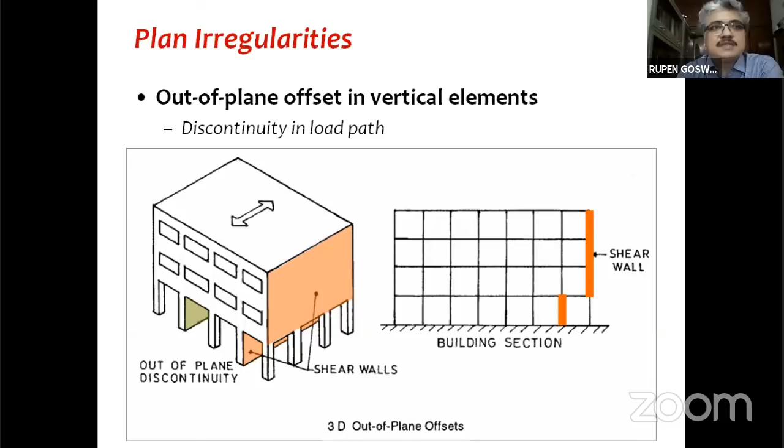And this is like a reentrant corner. Any 90-degree bend of load path is not good, as we all know from our basic mechanics class. Now, many people feel that it's okay provided we provide special stirrups and confining reinforcement in the columns. This is not acceptable, and that is why we need to ensure that these walls are not discontinued like this, but taken all the way down.

Why, if you ask? It is simply because these columns are not good enough. We have these 9-inch columns, and these columns cannot take the load and support the weight of thick structural walls sitting on top of them, even if we provide all the confining reinforcement we want. So this is not acceptable, and that is why the current revision of the code says that these structural walls will have to be necessarily taken all the way to their foundations and not be discontinued like this.

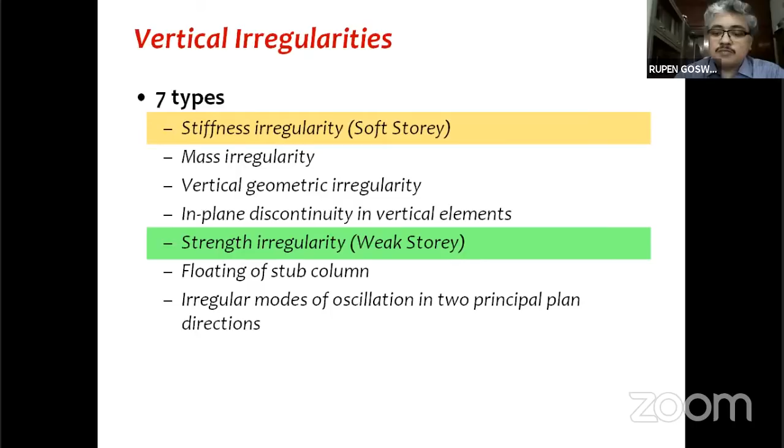Now coming to the vertical irregularities, these are two very critical irregularities: stiffness and strength. This is where you talk about soft story and weak story. Softness is about flexibility, so it's related to stiffness. Weakness is related to strength. Damage is related to strength, so weakness is also important. Which is more important? Both are important. There's nothing to choose between stiffness irregularity or strength irregularity.

So what is a soft story? A soft story is one whose stiffness is less than that of the story above. We saw that demand increases as we come down, so particularly the lower story cannot have less stiffness capacity than the story above.

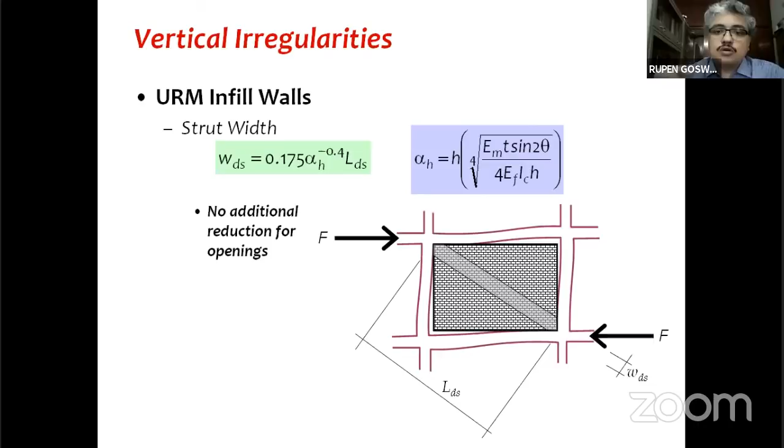So how do we capture this? Now the new revision says that you have to consider the effect of the infill wall also, and the code gives ways of how to model that. So essentially today the designer will have to create two models: one, a stiff model where the infill walls are modeled to capture stiffness irregularity, and another, the bare frame model, which we have traditionally used to capture the moment, bending moment, and shear force, and design using both of them.

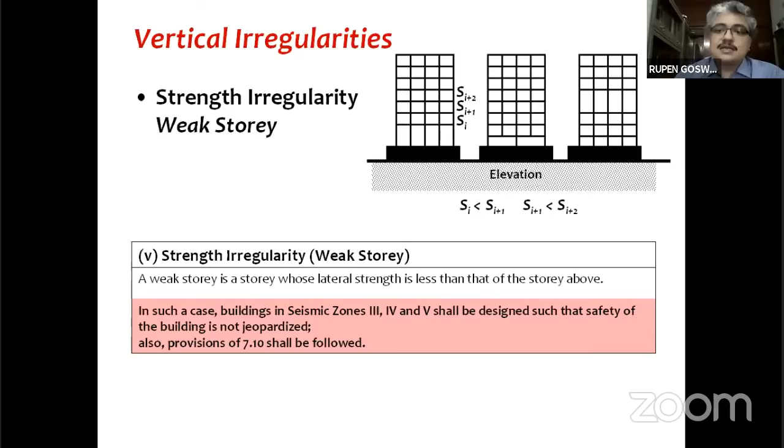Talking of strength irregularities, similarly we saw that demand increases as we come down, so a lower story cannot have less strength capacity compared to the story above. Today we say RC buildings should not have soft story or weak story. But we need parking, don't we? So we need a story to be open. This is where an important distinction has to be made by engineers: an open story is not necessarily a soft story or a weak story.

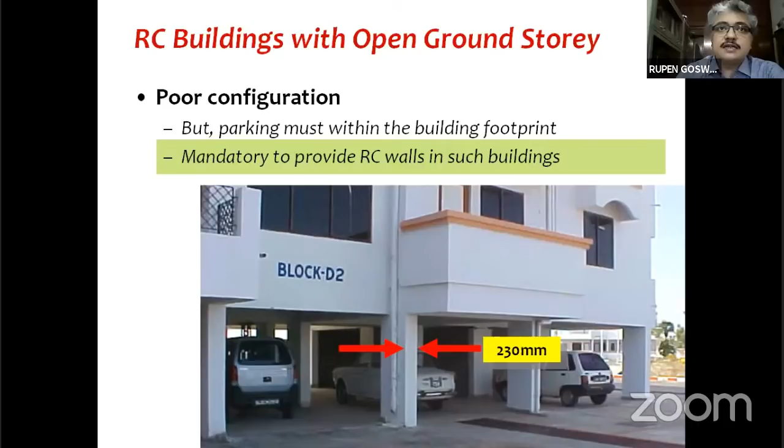So the code says these kinds of buildings must mandatorily have RC walls built into them. Gone are the days where we used to analyze a moment frame, construct it, and then put infill walls. A designer will have to necessarily design a building with RC walls right from the beginning.

How does it help? We saw that already these buildings would have these irregularities. Now how do we eliminate this irregularity? It already exists, 1:10, 1:2. If only we can add something that brings in a lot more stiffness, let's say a wall brings in 100 times stiffness, now the ratio 101 versus 110 is not so bad, not as bad as 1:10. It's only 90%. Similarly in terms of strength also we will be able to manage.

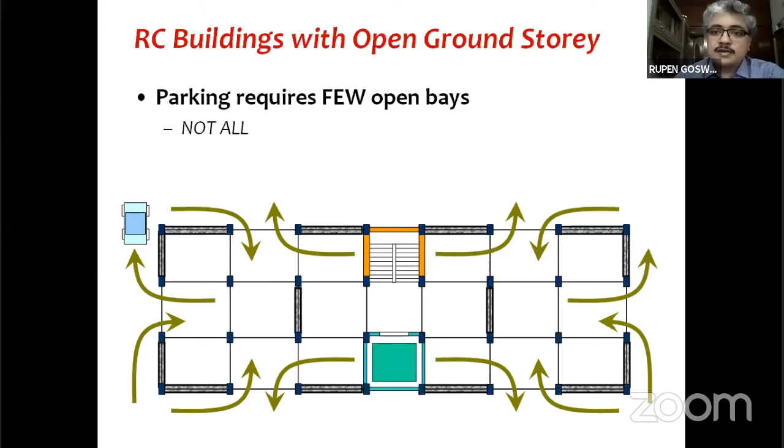So it's important that structural walls are provided. But what happens to the parking? Well, we need structural walls not on all bays; only in select bays we need to provide these walls, and we can still have parking in our buildings. So it is the responsibility today of architects and engineers to plan and design the structure properly. Of course, as a temporary measure, you can see people infilled open ground stories and continued to use that space for parking.

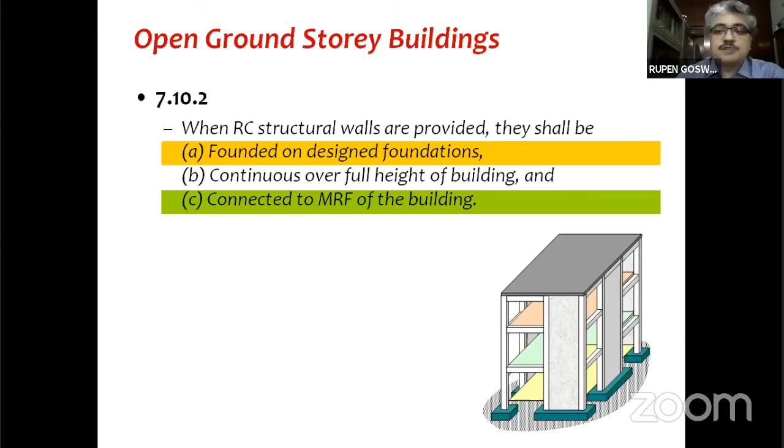So Clause 7.10.2 of IS 1893 now has clear guidelines that open ground story buildings must be provided with RC walls in select bays, and they must be founded on properly designed foundations, not truncated to be resting on beams and so on. They also have to be adequately connected to the moment frame.

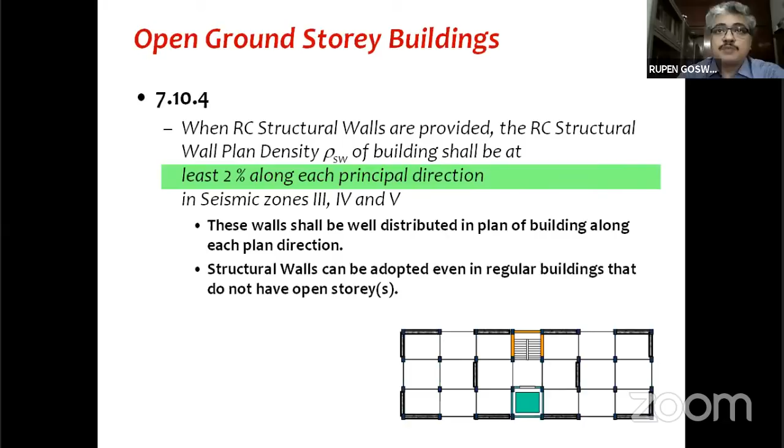With all these provisions, the code is not so stringent. It gives a relaxation of about 10 to 20% in terms of stiffness and strength. But the important thing is now all buildings must have at least 2% of RC walls or walls in each plan direction. In steel buildings we should provide bracings, proper bracings, if not steel plate shear walls. But for RC walls, they have to be designed using requirements of IS 13920.

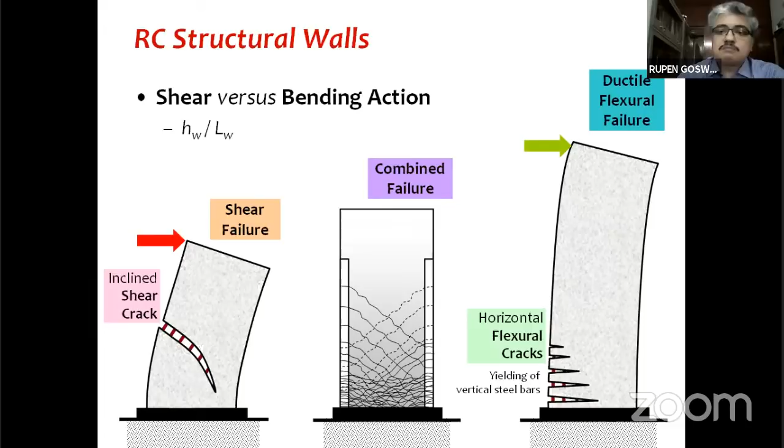Now you must have noticed I've held back from using the word shear wall, because wall behavior depends on their configuration. If you have squat walls, shear will be the predominant action; if they are slender walls, flexural action will be predominant. So the use of the term structural wall is more appropriate than classifying a wall as either shear or flexural. It doesn't matter.

All these provisions are essentially to ensure that we have ductile action in our buildings. Our buildings are ductile; they possess deformability, that deformation capacity to satisfy the displacement loading that will be imposed on them during that rare, infrequent, strong earthquake shaking. That is the primary objective of design codes: to prevent brittle failures.

So in closing, I want all of you to take a moment to read this: earthquake effects on structures systematically bring out the mistakes made in design and construction, even the minutest mistakes. It's a serious job, a very serious profession. You cannot afford to get away doing a lousy job until the earthquake occurs.

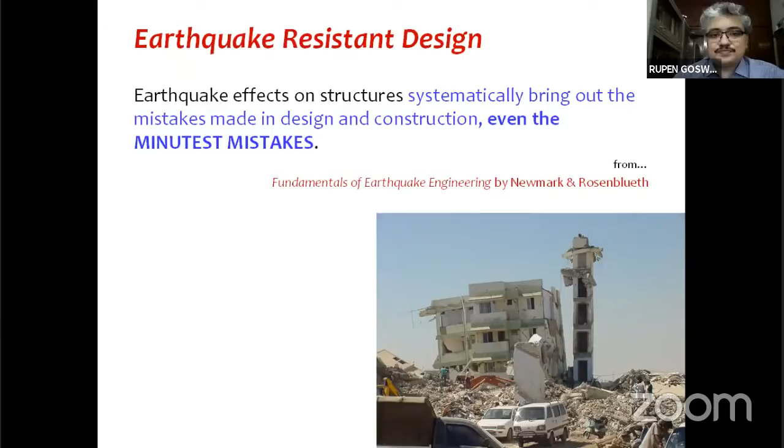Therefore, my request is that while design provisions and analysis methods are important, they are only tools. Our focus should be on understanding structural behavior. If we keep behavior in focus, then we will be able to do justice to this field of earthquake engineering, earthquake resistant design. We need to see the big picture and not get lost in the details of design and analysis.

We need to make a beginning, particularly my appeal to the younger colleagues, students. First, try to understand the intent of the code. Learn the details associated with each clause and develop strategies on how you're going to implement them in your practice. Knowing only the clauses is not going to help, you're not going to see the big picture.

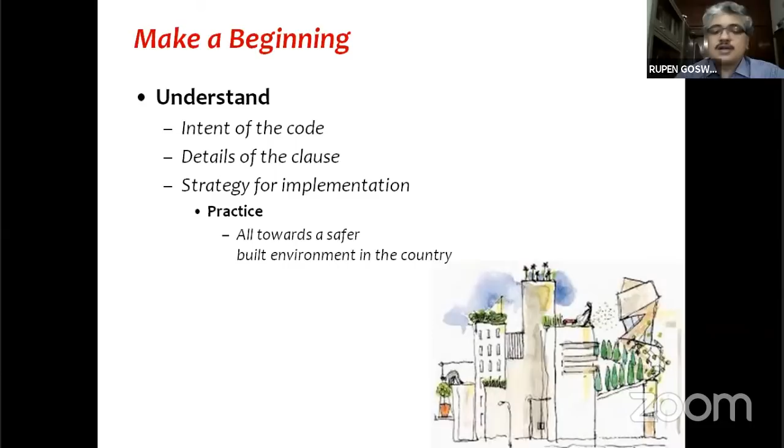We need to do this. Each one of us have to do this only to ensure that our country has a better and safer built environment.

Earthquake safety in the country has to become an action by the people for the people. Today, unfortunately, when we buy any other item, we don't mind spending extra. We want that big lakhs of rupees worth LCD TV, but when it comes to buying houses, we want a cheaper house. And cheaper houses will not necessarily be earthquake resistant. We are putting not only ourselves, but our near and dear ones' lives at stake.

This is where academia, industry, everybody, students, teachers, engineers, we have to take this seriously enough. We have to all pitch in and participate together.

In this, I'll close with this, and I'll thank, first of all, Professor Binu Sukumar and all her colleagues who had made this available, made this opportunity for all of us to come together to discuss this subject. But more importantly, I am grateful to BIS for giving an opportunity to be part of the process of writing some of these codes and get a better insight onto it.

Of course, no individual is successful without help and support of many people. So teachers, colleagues, students for photographs, of course, we teachers present a lot of things which are prepared by our students, so we have to acknowledge them as well. And internet, for instance, for some of the photographs and images.

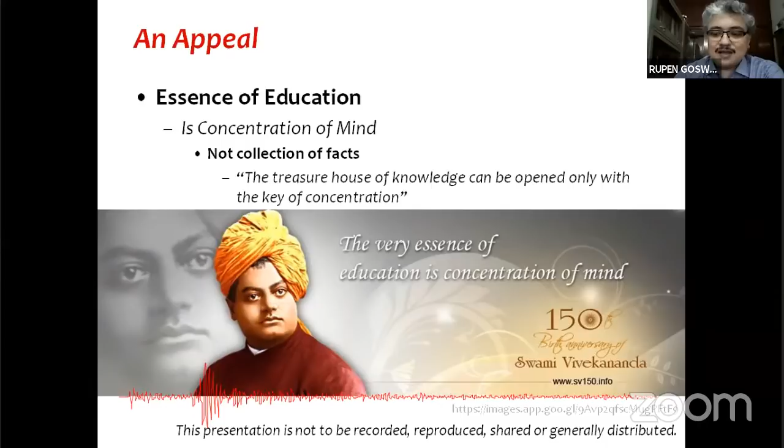So my appeal is, ask for bigger things. Don't ask for the trivials. With that, only we will be able to grow together and be useful to our country. I'll conclude here. Thank you all for being with me today. We'll take up your questions. Jai Hind.